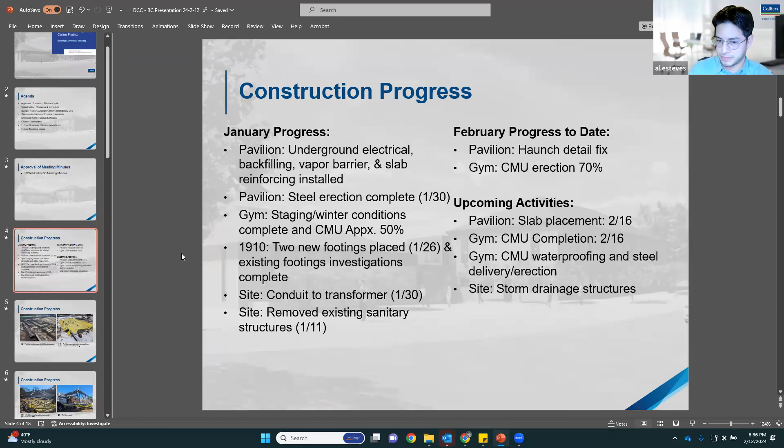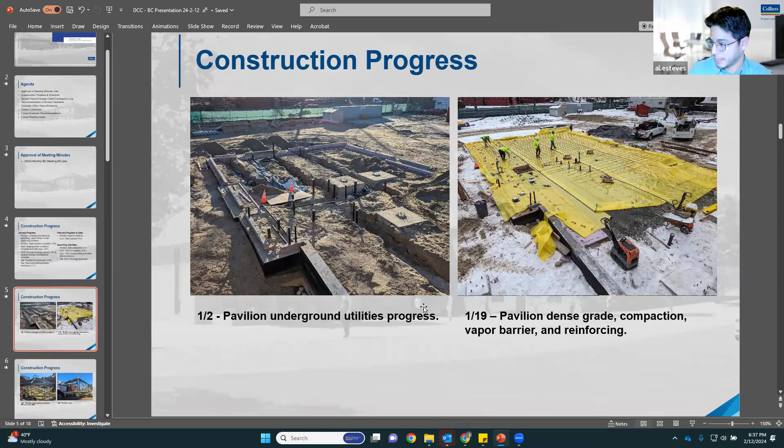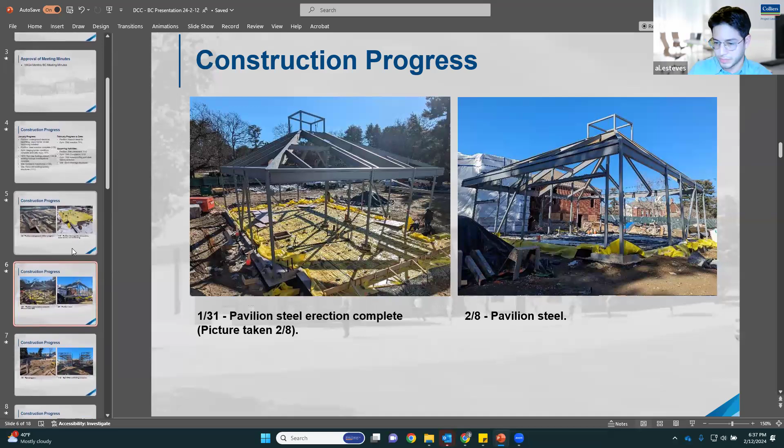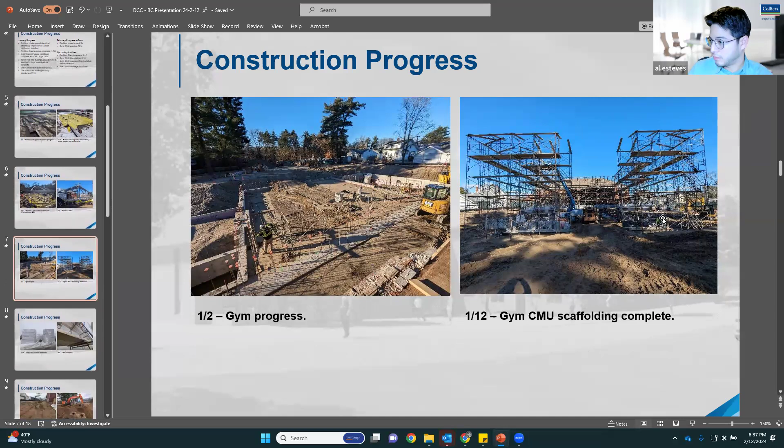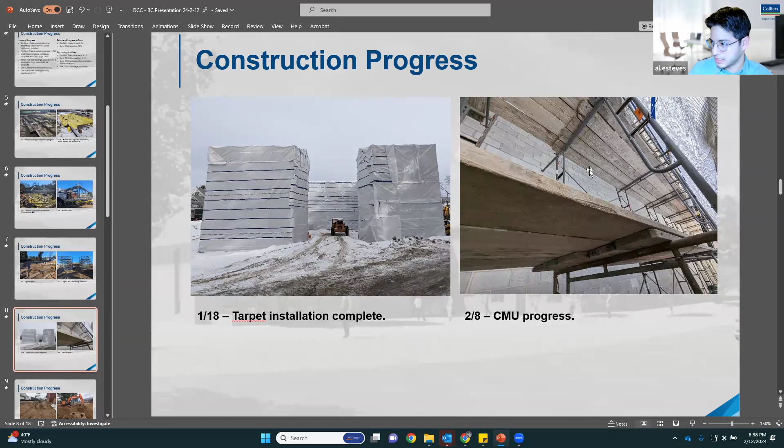Any questions on the images before I move on to schedule?

So, Al, were there any surprises when they were digging up the old system? I didn't hear anything, so I assume no surprises, and that everything went smoothly. They got this done in about a day, or a couple of days rather, so I didn't hear that there were any issues with that.

So does this pretty much wrap up all the digging that needs to be done, with the exception of the fire tanks, the water tanks? Pretty much all the rest of the digging is done. As far as I know, this is the last of the existing underground structures that were remaining. There's some asphalt they still need to remove by the entrance, existing asphalt that they kept for the parking, but other than that, that pretty much wraps it up. So we've pretty much uncovered everything that's going to get uncovered having to do with this project.

So hidden conditions going forward are pretty much over with, or the possibility of hidden conditions that may affect our budget and schedule. Other than the two big tanks, at this point we've pretty much passed that hidden conditions portion of the project.

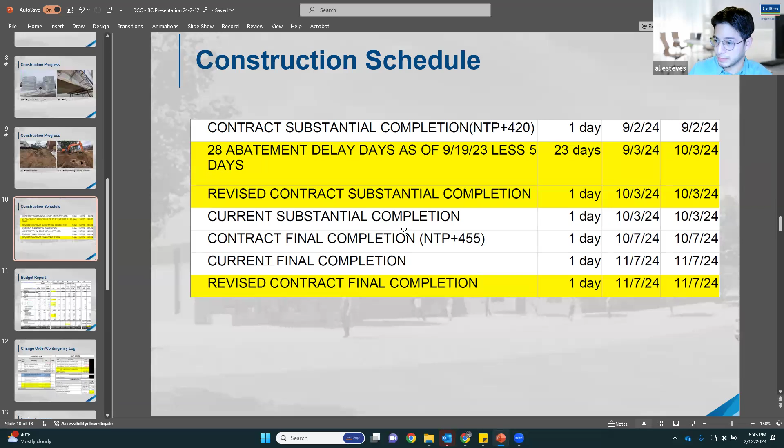So they're looking to extend the contract date out 28 days, which would eliminate the ability for liquidated damages. Or it pushes that trigger out 28 days. Yes. Okay, and what's our recourse on that? Meaning, do we have to accept that or not?

Well, I do believe that they are entitled to it. There was a lot of asbestos abatement delays in the beginning of the project. 17 of those days were strictly for additional work that was not in the contractor's bid. So I do believe that they are entitled to those 28 calendar days. We went back and forth on that for many months. They were actually originally asking for 41 calendar days, and after reviewing their backup, I felt that only 28 days were justified, so that's what I was comfortable with. They hesitantly agreed to that.

Let me ask the question differently. What is the contractual mechanism by which the point of substantial completion is extended? I understand your view is that they were entitled to that. Does the committee vote on that? Is there a contractual approval that grants them that? Have you given them that approval? I'm trying to understand the mechanism by which their latitude is granted.

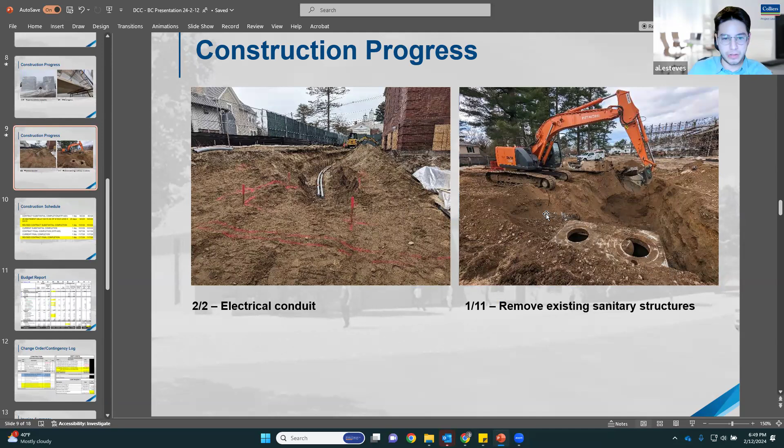Yeah, and they did some of that where they could, where it made sense. So for example, I just showed some pictures with some of the underground storm structures being removed. The reason they did not want to remove these earlier is because they were actually helping with the drainage of the site, so they wanted to wait on those a little bit. But they did some of the grading where they could around the site during the asbestos abatement process.

Okay, thank you. So Al, is there a way to push? I know M. O'Connor has been slow to react on some things you've been asking for to help clear up this whole change order. I'm 100% in agreement with Terry and others, sooner we get this resolved, the better. The other component is it'd be nice to know what our final impact on contingency will be. So what can we do, is there anything we can do to help or get them to give you the information so decisions can be made and this can move forward?

Yeah, so I was already planning on setting up a meeting with Crystal, who's the VP of Operations with M. O'Connor, to discuss a couple of things. There's no reason why we shouldn't be able to finalize this. I feel like we gave pretty clear comments on their initial submission of the general conditions, which is essentially what we're waiting on right now.

So let me set that up with Crystal and see what we can do to help expedite. I would think they want to get paid for those general conditions, so I don't know why it's taking so long to get that back. But I will set something up with Crystal and put a little pressure on, hey, we really want to get this thing wrapped up and move on from it.

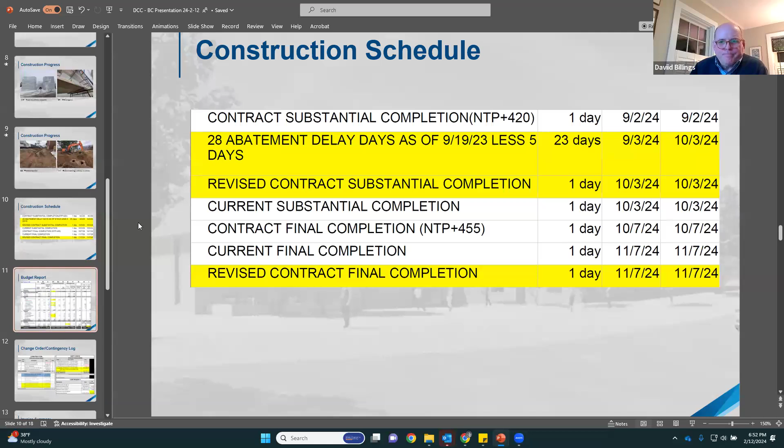Assuming that - and I'll go through on the next slide what makes up that 193,000 - assuming that gets approved as presented, worst case scenario, it's not going to be 193, we're going to go back and forth on a few of these. But assuming that gets approved, we're looking at around 86% remaining overall project contingency. So it looks like we're okay there, and I will present on the next slide what makes up that contingency. Any questions on the budget?

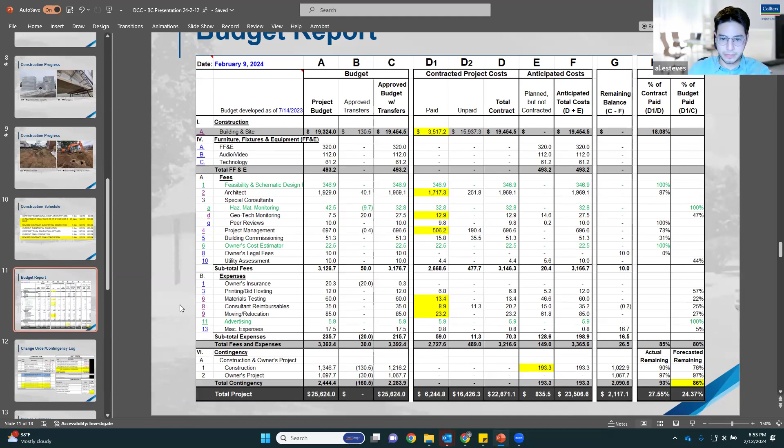All right, so going into more detail, starting with the construction side of things on the left, we have no new approved change orders. However, we're going to be voting on 2 potential change orders highlighted in blue. Both of these have been discussed previously. The first one is PCO, potential change order number 4, for the additional sprinklers. That is for 5,707. This one I've presented over the last couple of times. I believe their initial estimate was around 10,000 or so.

We went back and forth a few times and had them cut back on a few sprinkler heads that we thought should have been captured in their bid. They adjusted the pricing accordingly. The pricing now is $5,707.36. I believe that number is fair and reasonable, and it's supported with the backup. I recommend it be approved.

The next one is PCO number 7 for the fire protection tank valve. That's for the isolation valves for the two 30,000-gallon tanks. It's not required by code, but was recommended by the fire sprinkler subcontractor based on their experience with other similar tanks. We've met with the fire chief and deputy fire chief, and they both recommend that this be installed.

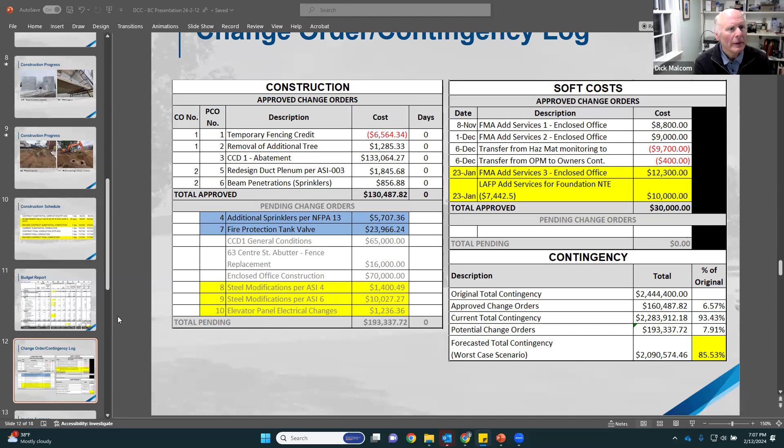Great, thank you. So Al, are you going to put together a change order on just this one PCO? Yes. Okay, we already have that change order, so this will be change order 3. That is correct, yes. Okay. Anything else we need to get into this change order?

Not that specific change order—what I have, I highlighted a couple of new ones down at the bottom, so that's PCOs 8, 9, and 10. Steel modifications, we're going back and forth on all three, so these numbers could change. Steel modifications associated with ASIs, still verification, in-field verifications of dimensions and whatnot, that's my understanding of it. So it's coordination issues. Yes. Okay, that's normal.

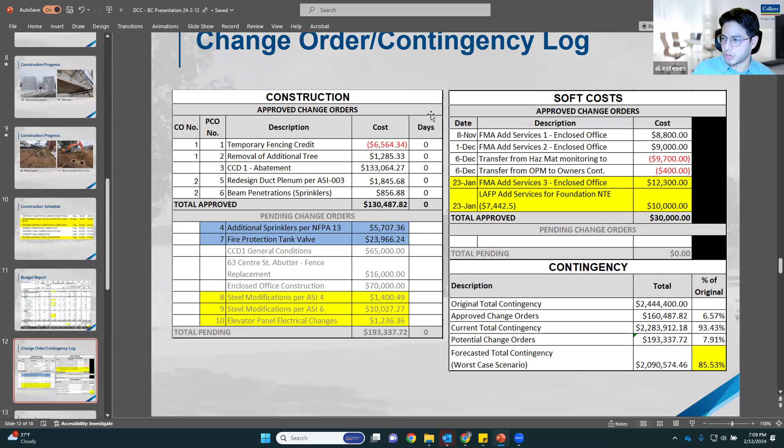Moving to the right on the soft costs, nothing much has changed. We have the two additional services for the enclosed office and for the structural engineer—we've shown those before. And then, again, the contingency, the worst case scenario—we're anticipating around 86% contingency left, assuming all of these potential changes get approved at the current cost. That includes, for example, the fire protection isolation valves we just discussed. Any more questions on change orders, potential change orders, contingency?

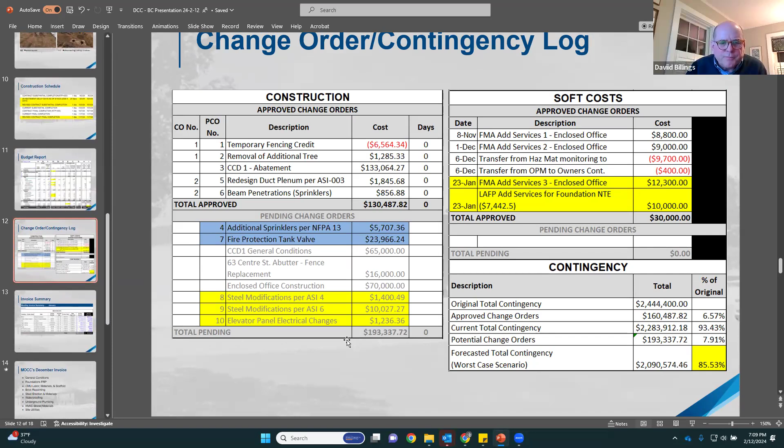How close are we to getting a price on the office? Yep, so that's a good question. I actually have that in one of my slides. Is it okay if I push to that? Yeah, I figured so.

Thank you, Al. So we have a total of 8 invoices for the month—well, most of them are for the month of January, some a little bit older. The first one is for the general contract, the January invoice for the general contractor, invoice number 7, in the total of $459,972.31. That is mostly for general conditions, foundations, formwork, reinforcing placement, CMU labor and material, scaffolding, brick repointing at the 1910 building, steel materials and erection, waterproofing, underground utilities, HVAC store materials, and site utilities.

We also have our Colliers' typical monthly invoice for $21,154. We have FMA's January invoice for $46,761. We have 2 Eagle leasing invoices for $398. Briggs, the third-party materials testing firm, for December for $9,607. And we have 2 geotechnical invoices for geotechnical observations, for $990 and $3,715.

I've reviewed all of these invoices and found them to be consistent with the contract terms and the work performed, and I recommend that these be voted on for payment. And just quickly on M. O'Connor, FMA, the architects have signed off on that requisition, on that payout. We have, yes. Yep, great, okay.

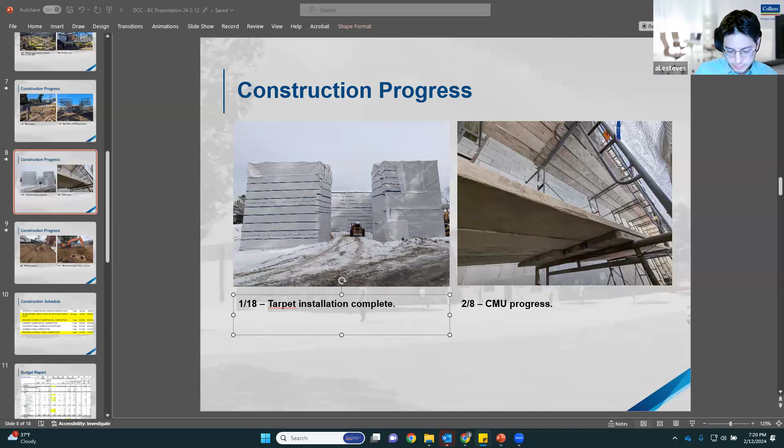Okay, is there any other discussion?